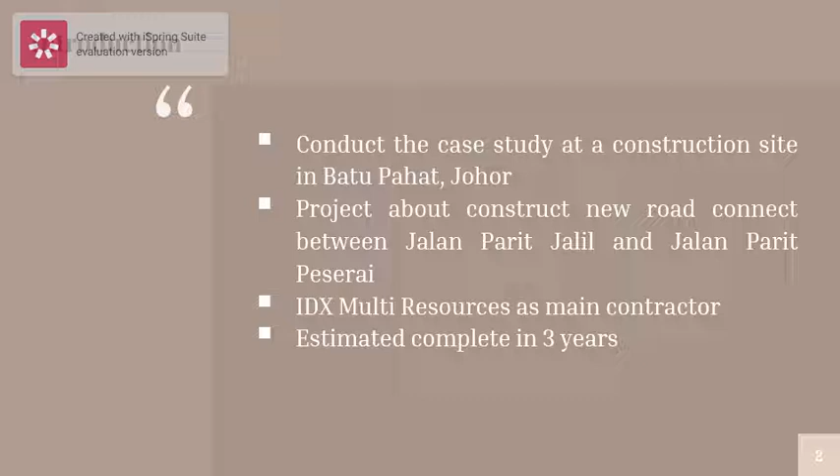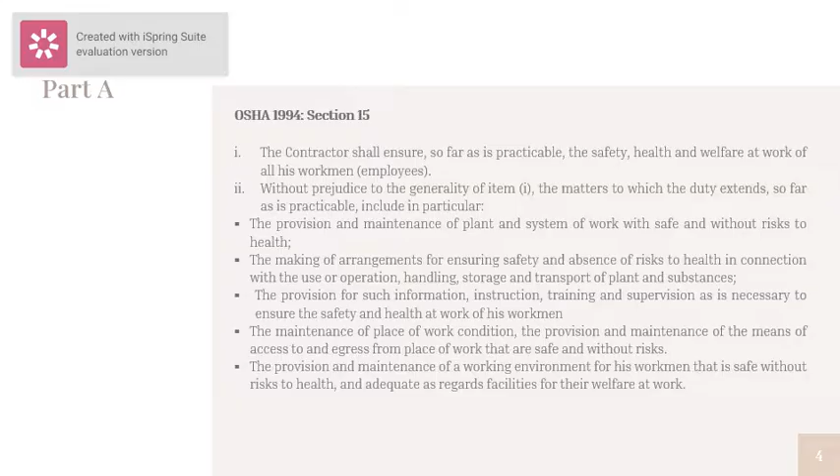Hi, my name is Muhammad Rizdan bin Amarif, and I will be explaining Part A, which is the facilities for OSHA that should exist in a construction industry or workplace. So the first point is OSHA related to Section 15.

In this section, the contractor shall ensure, so far as is practicable, the safety, health, and welfare of all his workmen. So the contractor must ensure all their workers follow the OSH Act and the safety and health protocol in the workplace. And without prejudice to the generality of item 1, the matters to which the duty extends include, in particular, the provision and maintenance of plant and a workplace that is safe and without risk to health.

In the site visit that we did, they are doing this by inspection and checking temperature for the pandemic that we have had over the last 2 years, so they take precautions about their workers' health. Making arrangements for ensuring safety and absence of risk to health in connection with the use, operation, handling, storage, and transport of plant and substances. So for this, they are making procedures and lists of what they're going to do, so that accidents will not happen.

And other list of workman permits, the CIDB green cards, tools and machineries that have been used, and other traffic and safety controls that are working in the workplace. And then personal protective equipment - this is the most important part that all the workers must have.

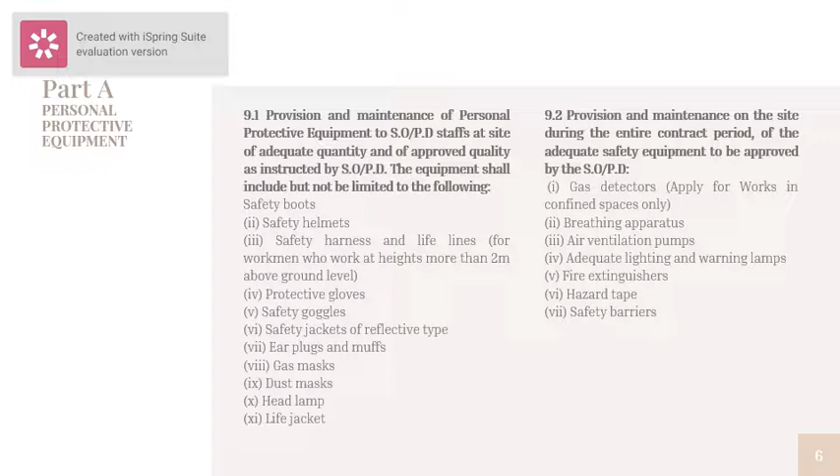Assalamualaikum. My name is Tengku Imran and I will be presenting on part B regarding type of hazard that may occur on site and their preventive action.

For the first one, based on reference from HIRARC, hazard that may occur on site is mechanically struck, which is getting hit by a vehicle when delivering material at site, which may lead to fatality or serious injuries. For risk assessment, the likelihood 1 combined with severity 4, making the risk level at 4, which is considered as low at the site. The risk control recommendation is that the unloading area at site must be barricaded.

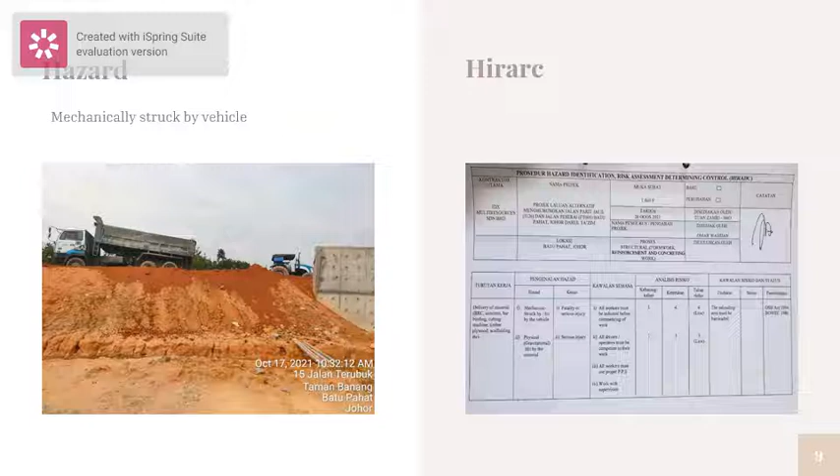Moving on to the second hazard that may occur on site, which is getting hit by working tool or materials while site setting. The possible injury caused by the hazard is minor injury. The risk assessment for this case is 2 for severity, 4 for the likelihood, making the risk level at 8, which is considered as medium at the site.

For risk control, the recommended control measures are such as toolbox meeting before start work, ensure proper housekeeping, no adjacent obstacle, and proper material arrangement, which should be taken note by the person in charge.

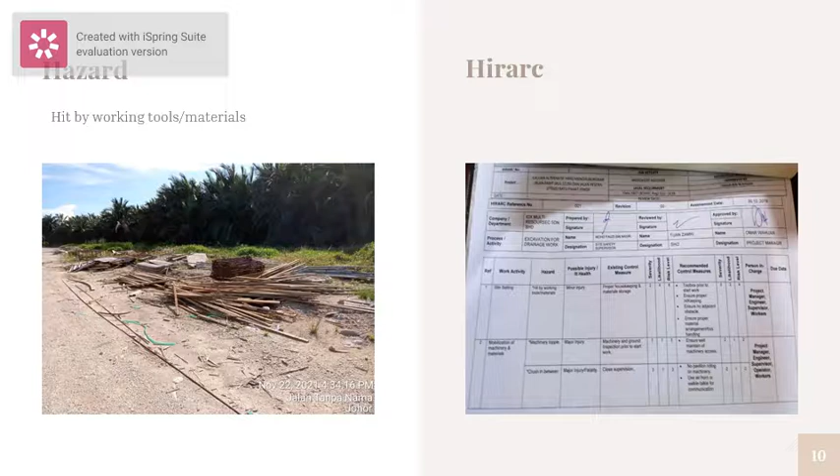The third one is welding hazard. Based on the HIRARC, the hazard identification while performing welding work is exposure to fire, hot sun, and electrocution, and the possible injury are body burn and heat stress.

The risk assessment are 3 for likelihood and severity, making the risk level at 9, which is considered medium. The risk control that can be made are such as place emergency button at the welding area and provide specifically Class D fire extinguisher which is effective for welding work near the area.

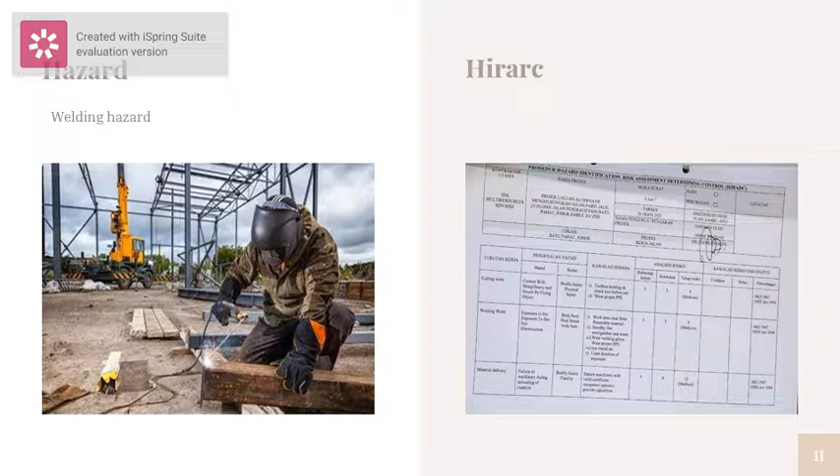Let's proceed to the fourth hazard under lifting and hoisting process, which is material might hit the workers or buildings while centralizing the hoist over the load before lifting process. The possible injury are serious body injury, fatality, or damage of properties.

The risk assessment shows that the risk level at 4, which is low. The risk control for this hazard are hire qualified and experienced person for the crane supervision and provide designated person only to control machine unloading activity.

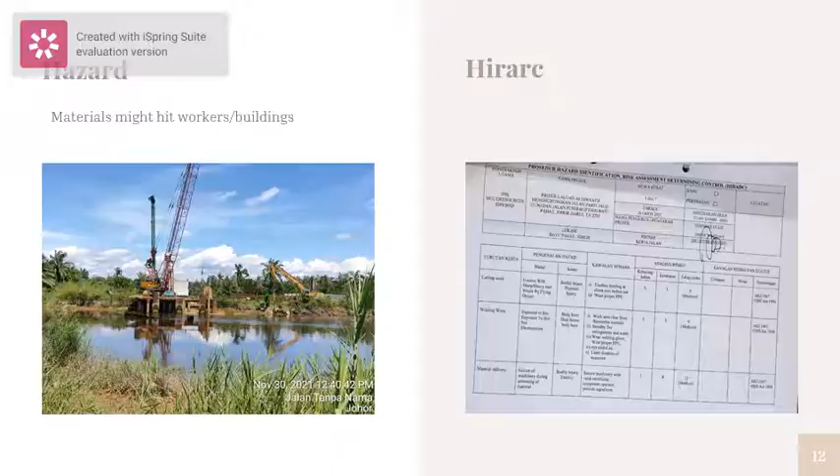The last hazard that I will be presenting is COVID-19. Hazard identification for this case is it is a biological hazard which the virus may spread through coughing and contact with others. The possible ill health is the person who is affected might have health complications such as internal organ failure and fatality.

The risk assessment shows that the risk level is 60, which is high. The risk control or recommended control measure on the site is all subcon and people who came to the site need to record their details. Thank you.

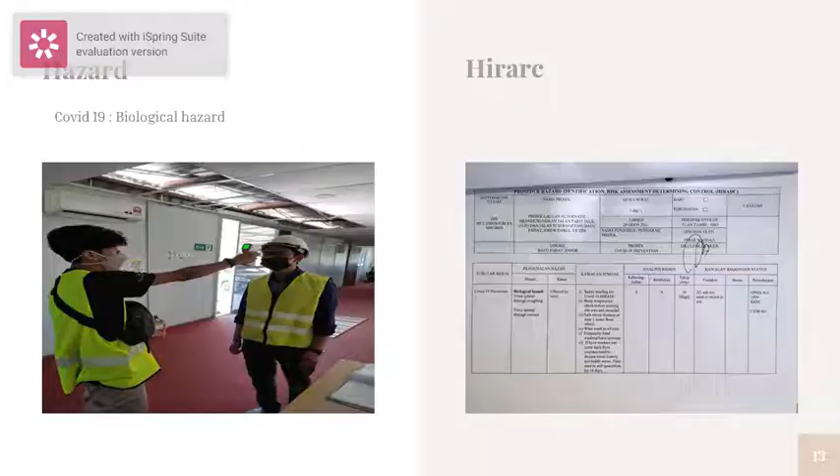Hello, my name is Muhammad Haikal. I'm going to present about Part C, the procedure and the activities that need to be carried out in the event of emergency. The first injury is the slip and fall danger.

The procedure needs to be carried out is the victim has to stay put and stay calm and wait for the help. Breathing skill is important at the moment to avoid fainting, and inform either the site supervisor, engineer and safety officer. Call for the ambulance, report the accident.

As the record of evidence, the victim can ask for compensation if the incident occurred due to company failure to provide a safer workplace.

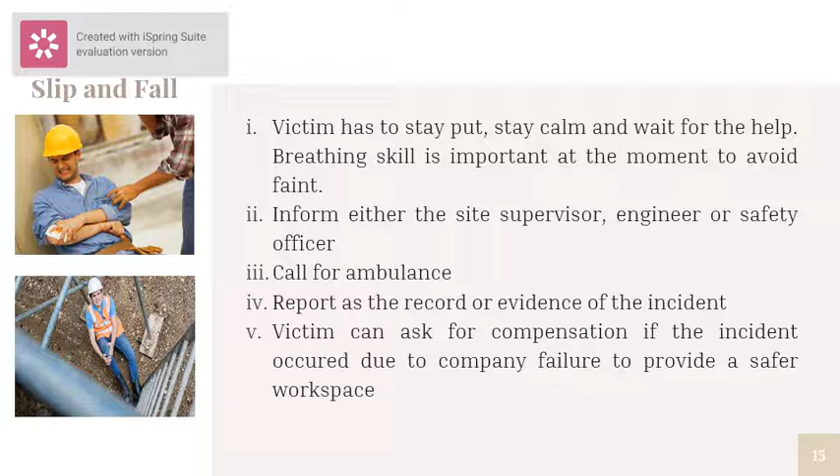The second one is the cut injury. Cuts from tools and equipment such as saws and knives will always be a serious and critical injury. This is because the equipment and tools used on construction sites are all heavier and huge, so the cut will be bigger than any common cut that could happen in a lab or factory.

It can range from minor cuts to severe lacerations and can cause loss of one finger or more, even the bones of your leg and hands. Such accidents can happen because of poor handling of the tools, machines or equipment by the workers themselves.

What can we do if a cut injury happens on site? First of all, we have to stop all the tasks or work immediately. Then we have to get the first aid kit and start to put antiseptic and bandage on the cut injury. Otherwise, we have to call for the ambulance if the injury is serious and more critical.

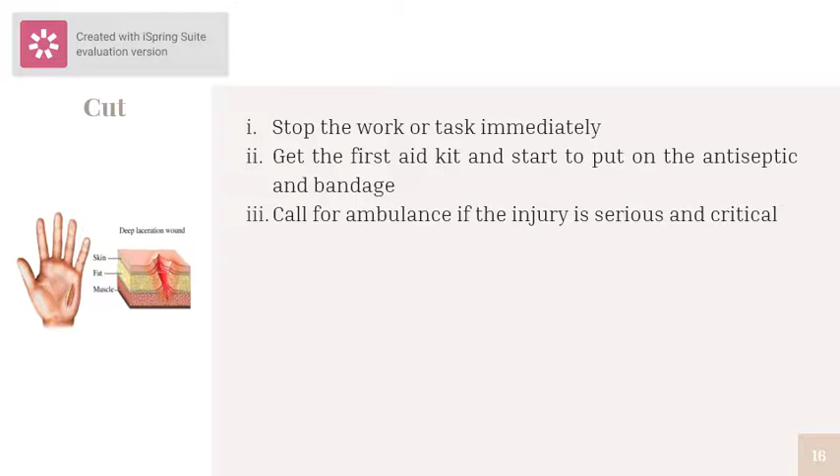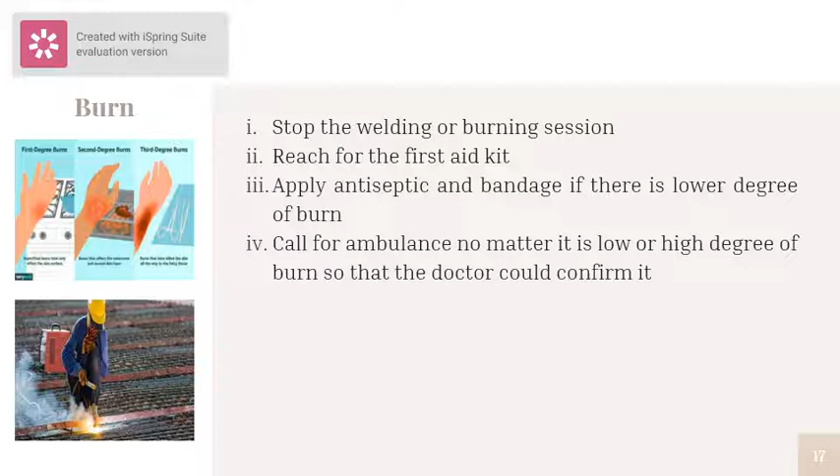The next injury is burn. The procedure is to stop the welding or burning session, reach the first aid kit, apply antiseptic and bandage if there is a lower degree burn, and call for an ambulance no matter how low or high the degree of burn, so that the doctor could confirm it.

The next one is landslide. Landslide is an unwanted incident that could happen on a construction site. This kind of situation may occur due to two causes: the first is an imperfect cut of slope done by the workers, and the second may happen due to the type of soil itself.

Landslide is a serious incident and tragedy that could happen on a construction site, as it may cause loss of life. There are 4 basic procedures when a landslide happens. First of all, we usually have to stop all the tasks and work done by all the workers included on the site.

The second one, health and safety officers (SHO) and site safety supervisors (SSS) have to instruct all workers and staff to gather together at the emergency point or emergency site. Next, they have to make a head count of every single staff and worker on site. Lastly, they have to wait for the authorities such as firemen and police.

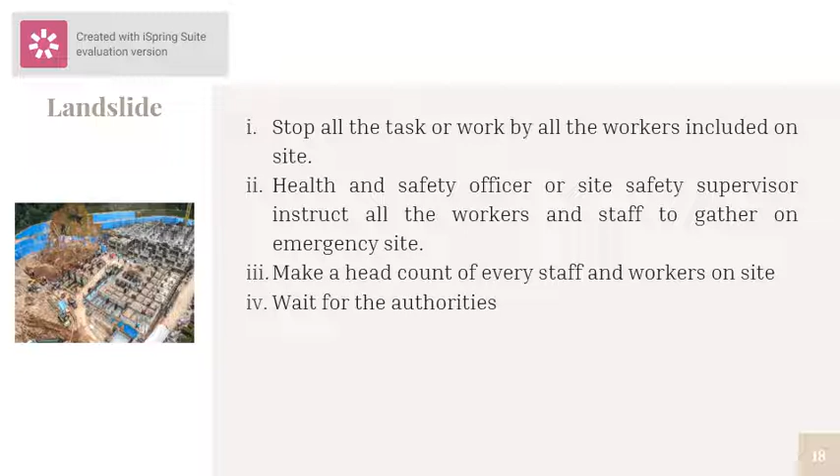Next is the transportation accident. The procedure is to stop the transportation immediately, check the driver and co-driver's condition, inform the safety officer if there are injuries, get an ambulance if the injury is serious, and make a report including pictures as a record for evidence of the accident.

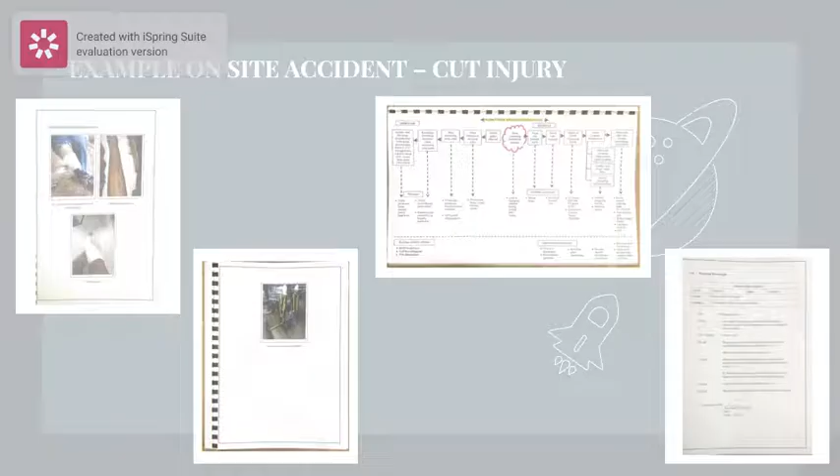I will present about the OSH management system in this project. Occupational health and safety management system encompasses more than a health and safety program. Having an effective management system improves the ability to continuously identify hazards and control risks in the workplace.

There are 5 elements of the occupational safety and health management system. It starts with policy, organizing, planning and implementation, evaluation, and action for improvement. We will go through the policy first. In this project construction, the policy is according to the Malaysian Public Works Department policy.

To avoid the spread of COVID-19 on building sites, protocol must be established. Companies must consider any COVID-19 safety regulation set by the state or municipal where the project is being developed while undertaking construction projects. In order to prevent COVID-19, this project conducted a few safety activities such as checking the temperature for each worker and sanitizing the office.

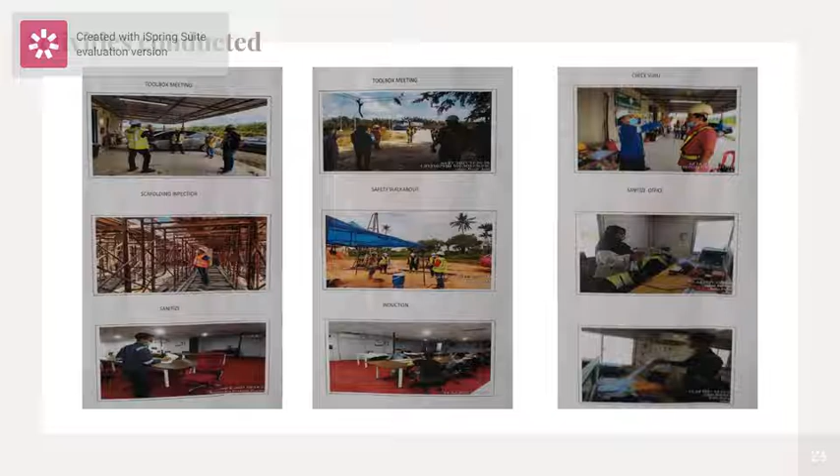Other than that, toolbox meetings are also one of the safety activities in this project. There are 2 meeting checklists that need to be filled in by the workers, which are the checklist of attendance and the checklist of minutes of meeting or issues discussed.

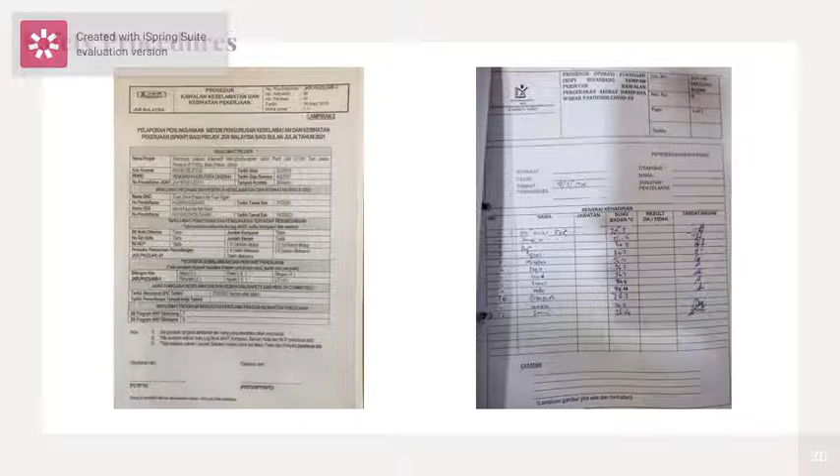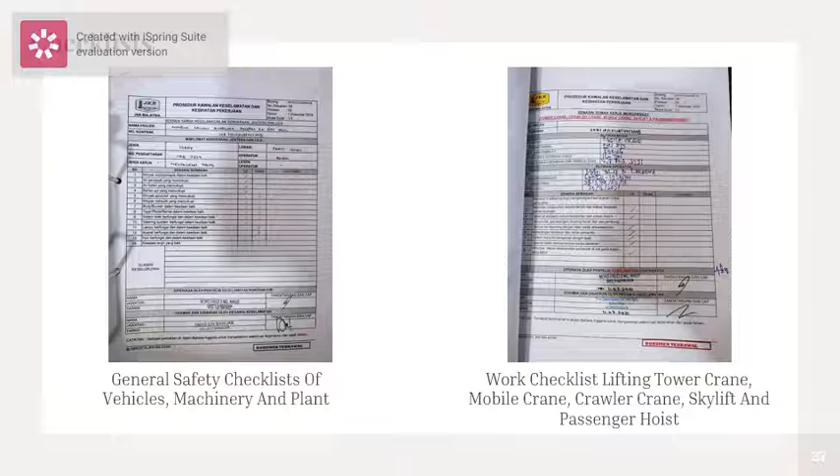For inspection procedures, the usual construction inspection includes the following activities: daily on-site inspection reports, organized inspection checklists and records, attendance at project meetings, keeping track of the contractor's timetable, and handover checks to ensure a smooth project closure.

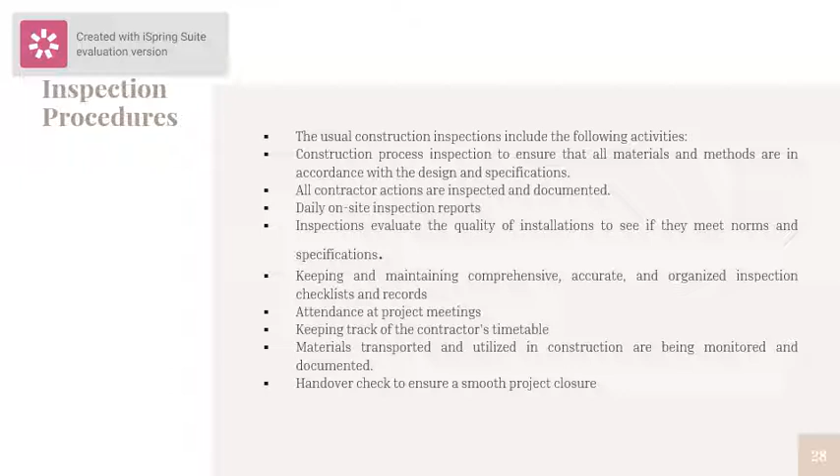Last but not least is the application of personal protective equipment, PPE. The first one is the safety helmet, which is used to protect the head from falling objects and to recognize or indicate the workers.

The second one is safety spectacles, used to cover the eyes from sparks, dust and others, and also protect the eyes from injury. The third one is safety boots as protection for feet from falling objects, and the last one is hearing protection, used to prevent noise-induced hearing loss and reduce the noise energy reaching and causing damage to the inner ear.